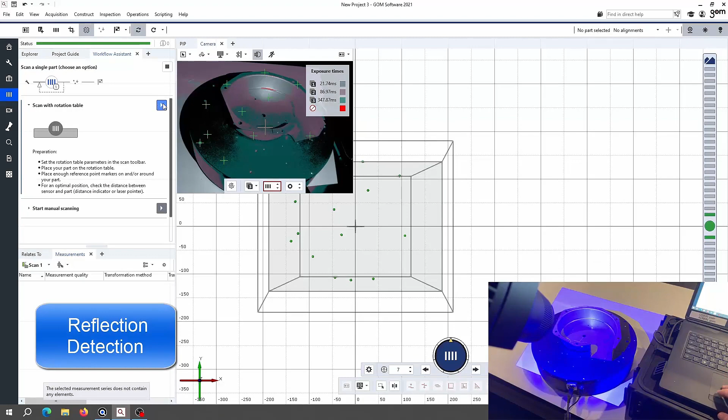Let's take a look. Reflection detection is a special setting that allows the ATOS Q to first project a series of different patterns on the workpiece so that the software can calculate locations where reflections could be a problem for noise or bounce back in the scan data.

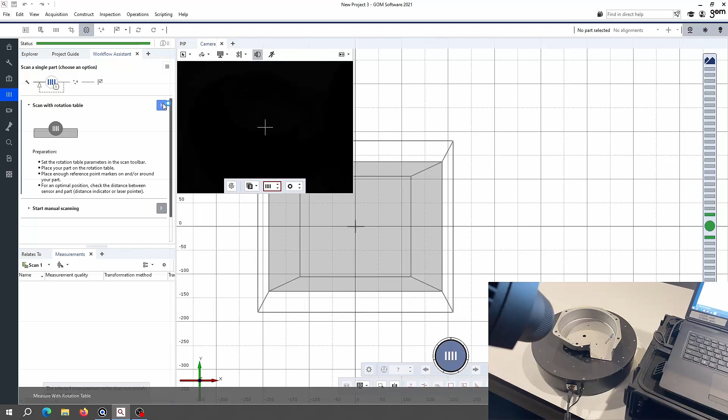Once this is complete, instead of taking an entire rectangular frame with the projector, the ATOS Q is able to take a series of partial scans, each one just covering a limited area of the work frame at separate moments in time. Here's what the scan looks like without reflection detection turned on, followed by the improvement that reflection detection can make.

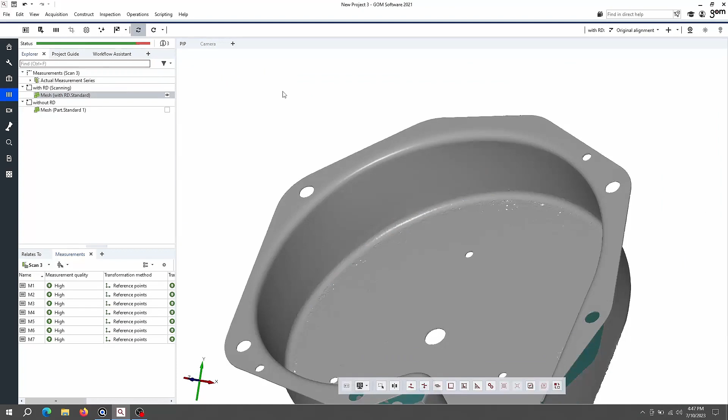Now let's take a look at how gray value features can help us locate the very important features like holes and outer edges of the sheet metal part. I'm going to start by defining some basic geometry like an auto circle for this hole. For its measuring principle, I'll define gray value features.

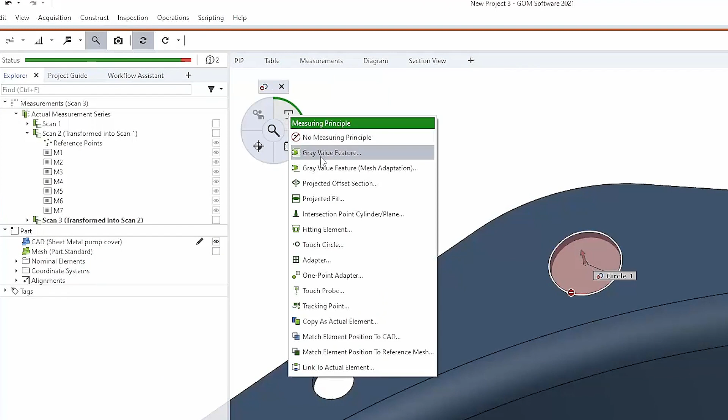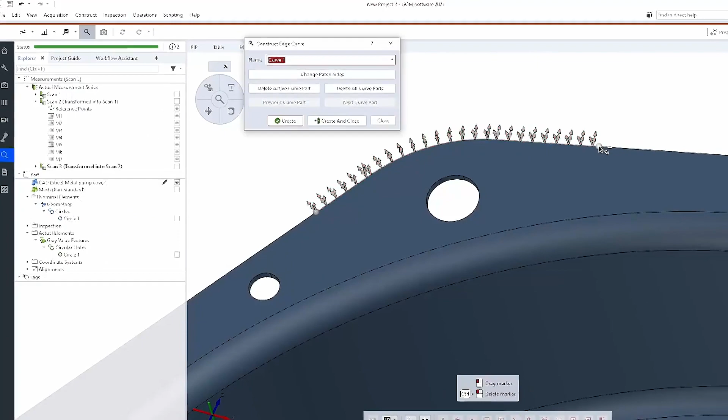Gray value features are measured from the two-dimensional photographs that are taken by the ATOS Q as it scans. This gives us a way to locate these very small features without having to get the outer edges or the cut faces of the very thin sheet metal, but by the color difference between the gray sheet metal and the dark background, we can get these features very efficiently using the ATOS Q.

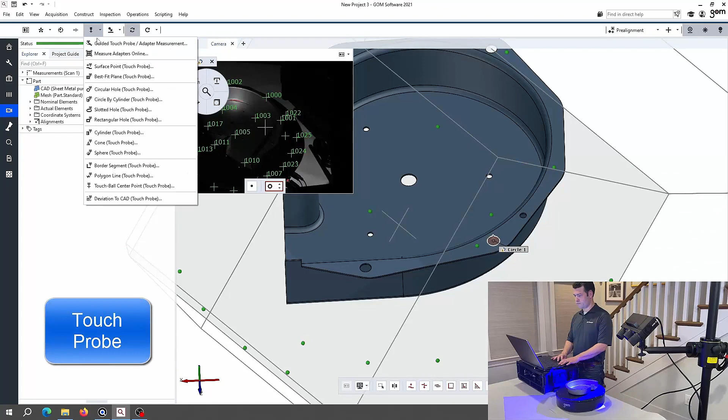Another great way to capture difficult surfaces, like holes on very thin-walled objects, is by using the ATOS Q's touch probe accessory. This touch probe is a very simple device with a set of targets built onto the handle that allows the ATOS Q to recognize the precise position of the ball stylus on the end.

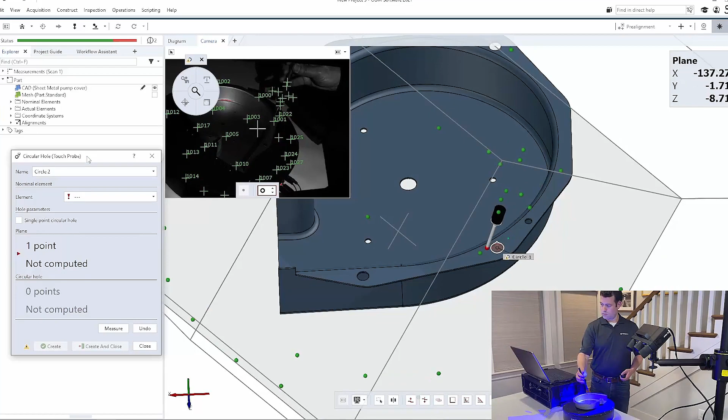This allows us to take individual point measurements to get simple geometry like the flat plane and cylinder that are needed to get the circular edge of this hole without necessarily even needing scan data present in order to capture it.